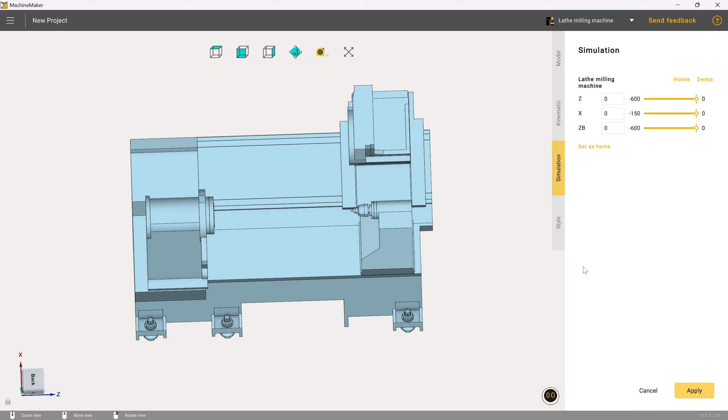Hi there. So in this video now, we're going to be importing and setting up the lathe chuck, including defining and limiting the chuck jaw range of motion as well. So I'm going to click on apply to get out of that particular tab.

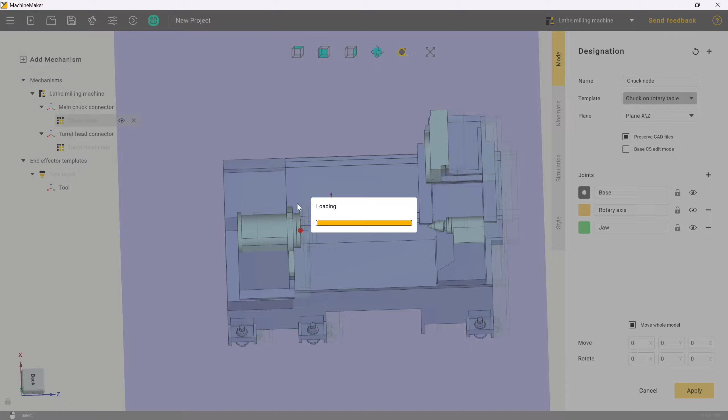And we are going to import the chuck by double clicking on chuck node here. And you'll see this opens up the file import window. We want to grab the chuck body and the chuck jaw and click on open. Now, because we defined the connection point before, that means that our chuck is already in the place we need it to be, which is great.

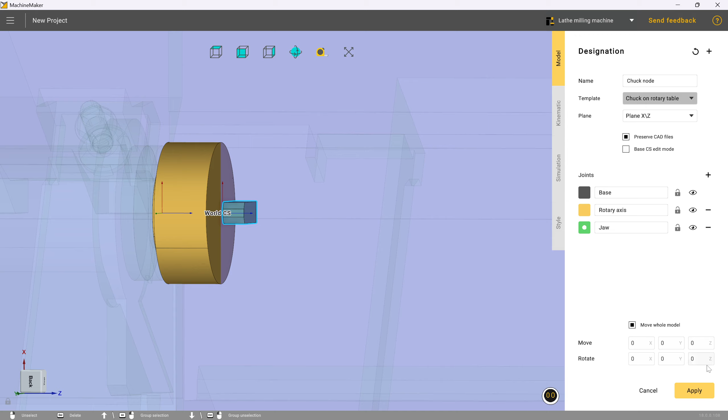However, we do need to define the rotary axis and the jaw here. So I'm going to zoom in slightly. I'll click on rotary axis for the body of the chuck and jaw for the jaw, as one would expect. And again, not clicking apply yet, I'm going to click on kinematic.

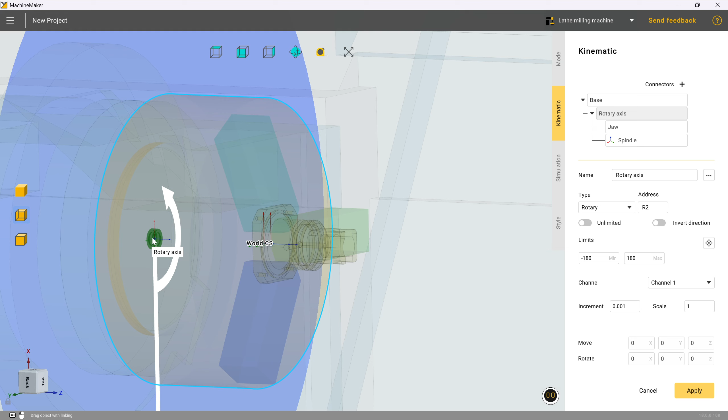And if we zoom in here, we can see that the bearing face for the rotary axis, which is what defines the center of rotation as far as the simulation is concerned, is currently set to the rear of the chuck itself and onto the mounting face. So this is exactly where we need it to be. However, as with defining any kind of attachment base or whatever in Machine Maker, this can be moved if needed by holding down Control and click dragging it to the appropriate place.

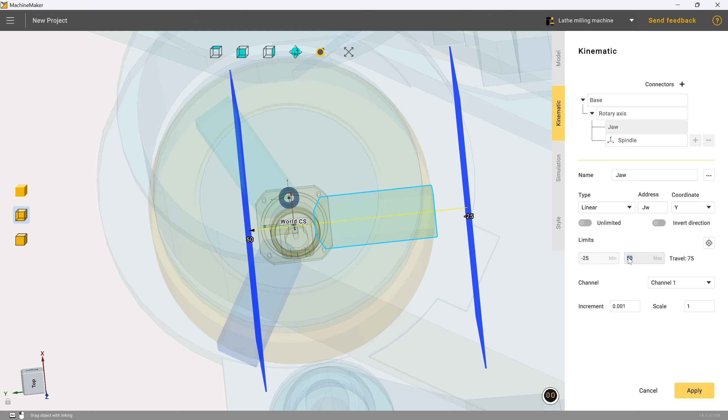So moving on to the jaw, we need to define the range of motion for this. And as we can see, that's currently set to move in the incorrect axis. So we will configure the axis to the right direction now, which is the Y direction. And we're going to limit this range of motion a bit. So I'm going to set it to -25 and 0 because, well, we could probably afford for the chuck jaws to move in a little bit further than this, but we'll set it for this for now because 0 is a nice easy value to retain.

And I'm going to click on simulation before we go any further with it, and click on demo just so that we make sure there's no wild, weird offset rotation with the chuck, and that the jaws move in and out smoothly according to what we're expecting.

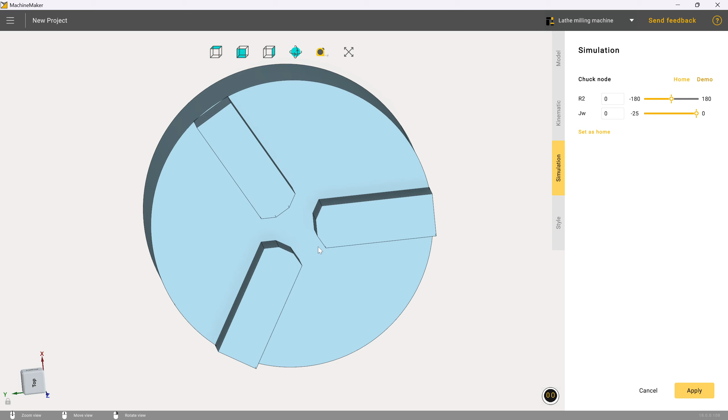So now that we've defined that, in the next video we're going to be taking a look at the slightly more in-depth topic of setting up tool blocks and the turret head, which is a bit more involved and will take a bit more time than this.